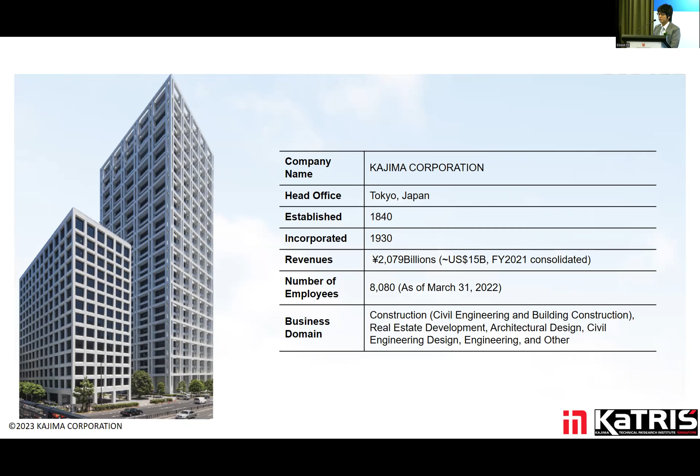I'm a member of the Technical Research Institute. We want to expand our activity not only in Japan but also elsewhere, so now we are especially focusing on Singapore. My department is in the so-called KaTRIS, Kajima Technical Research Institute. Singapore is very crucial not only for gathering good information, but also for disseminating advanced technology. So our role is to develop new technologies and collaborate with very good institutes and companies all over the world.

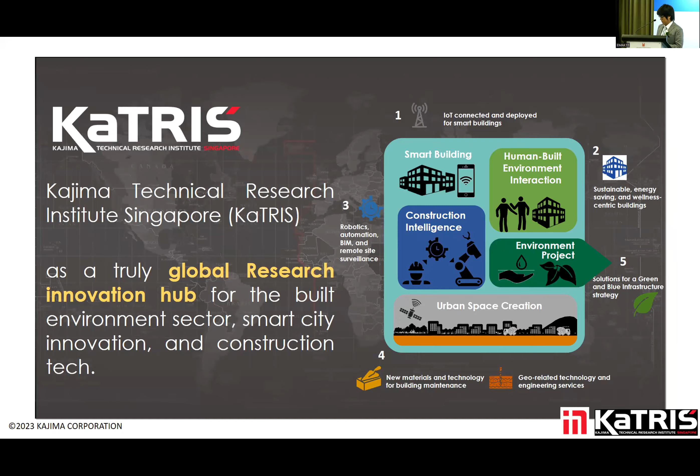Next, I'd like to explain our activity as a private construction company. Firstly, our Kajima Corporation declared the triple-zero goal for 2050. The triple-zero means zero carbon, zero waste, and zero impact. I think it's very hard to achieve by 2050, but we must do it. For achieving this by 2050, we set milestones at 2030.

One of the milestones related to today's workshop is that ZEB, Zero Energy Building, becomes mainstream. Our company is targeting zero energy buildings by 2030 as a major construction product.

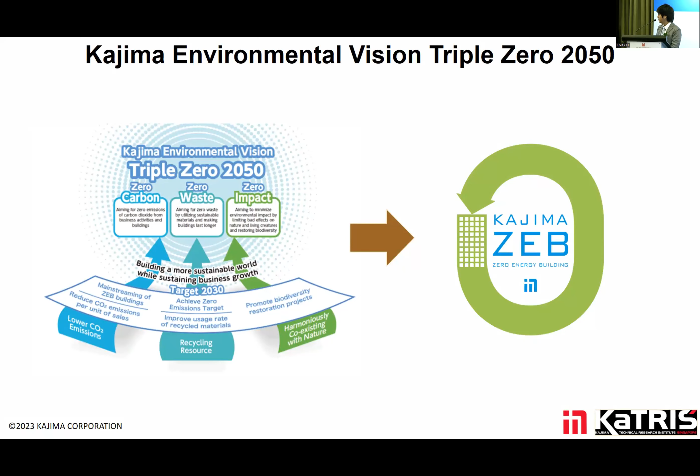Let me explain our policy for achieving zero energy buildings. To achieve ZEB, we set 4 phases of construction work. You can see this one. The first stage is eco-design.

In terms of front loading, it has a big impact, so we mainly focus on this technology. Eco-design includes passive designing, but also introducing highly advanced energy efficiency devices and facilities.

The second is designing for eco-consciousness, leading occupants to be eco-conscious. It's not enough to just introduce the facility and the building. To achieve true ZEB, our human behavior is so important. So to nudge our activity toward zero energy, we are trying to establish the design approach.

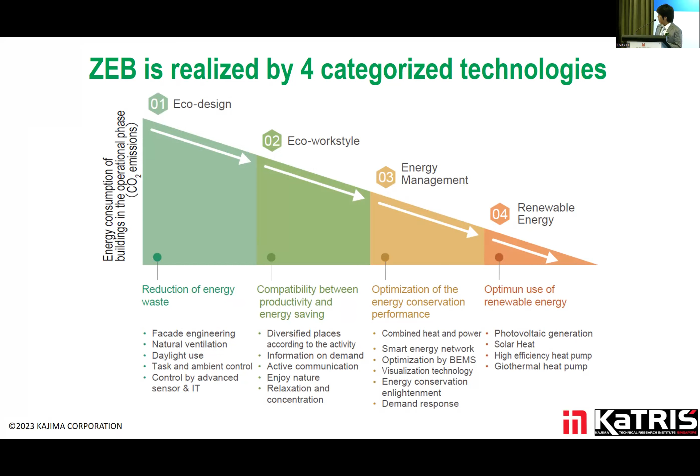Finally, this is the introduction of renewable energy. Firstly, I'd like to show our examples of these phases, starting with the eco-design stage.

First of all, for the design, facade design is so important. The facade is not only a heat source, but also has a big impact on well-being. By introducing design methods for optimization of the facade, we can contribute a big impact on energy savings. For example, you can see two figures.

The left-hand side shows how to utilize the outside environment, not only for the view, but also for introducing lighting, day lighting. The right-hand figure shows how to mitigate the thermal impact, not only heating load, but also cooling load. So both combinations are important as a first stage.

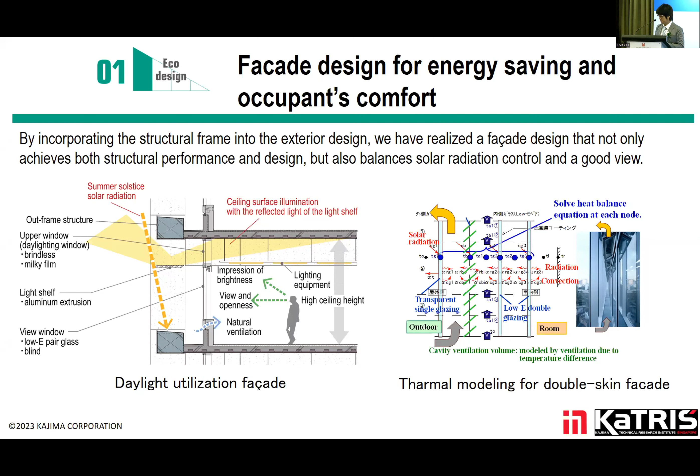We also have a lot of design techniques, but as a second example, let me introduce the hybrid cooling system. Some people explained this system in this workshop. This type of system is very suitable for the Southeast Asia region. It's a combination of the ceiling fan and the conventional air conditioning system. This contributes at least 20 to 30% energy reduction, and furthermore, improves thermal comfort.

Many people want to get more wind, so by introducing this system, many occupants are satisfied with the thermal environment. Finally, this kind of increased air movement also contributes to a reduction of COVID-19 infection.

To be honest, I'm also a member of the supercomputer Fugaku project, which contributes to mitigation of COVID-19 infection. By utilizing such supercomputing power, we understand how background air movement contributes to mitigation. That's why we want to promote this technology.

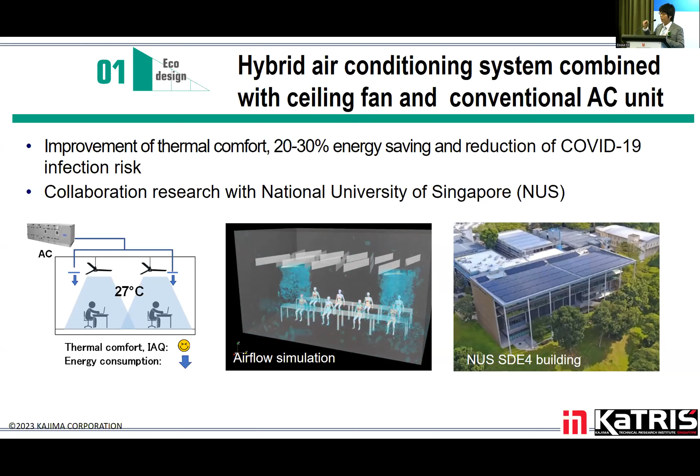As a second topic, I'd like to explain the eco work style as phase 2. This is so important. Maybe you remember Professor Clayton Miller explained the importance of nudging occupant behavior. To do it, we need to establish the way. For example, if you open the window, no need to introduce HVAC control energy.

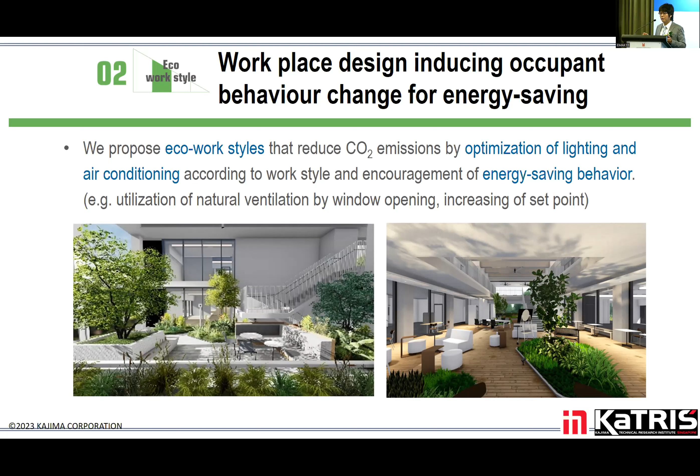Fortunately, Singapore is a tropical climate, so there's a lot of availability for outdoor area. To nudge the occupant toward such eco-conscious activity, we are trying to establish such design. For example, introducing a large window leads people to feel more comfortable, even at a higher set point.

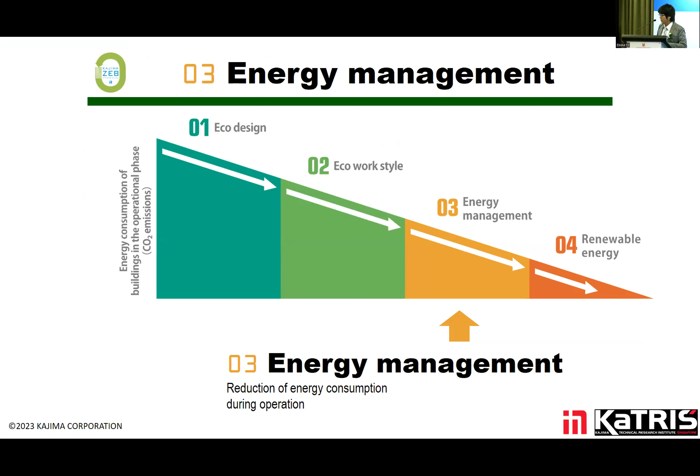The third point is energy management as phase 3. This phase is very common for all people, especially in this workshop. It's important to introduce very efficient energy management for building operation, for example visualization and sophisticated management. But today I won't explain more about this.

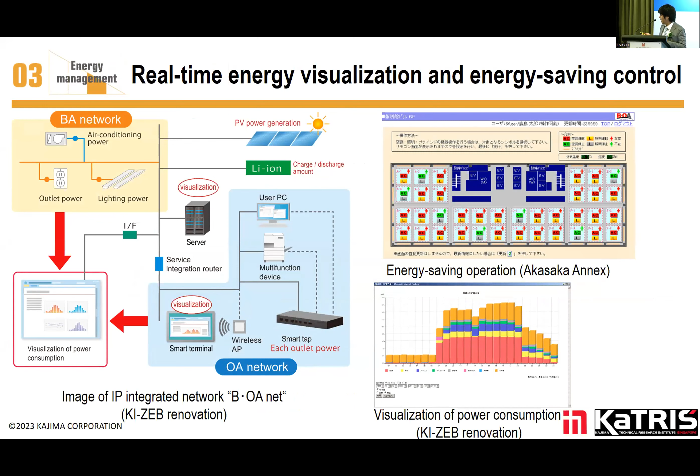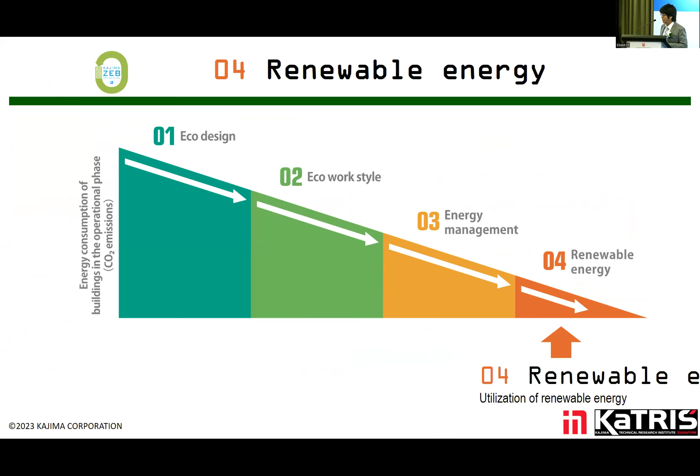Finally, we should use renewable energy as phase 4. One of the main resources of renewable energy is solar PV. This is very common, but we should consider the next phase, for example considering integration with building design and utilization of building integrated PV systems. We are trying to establish such utilization, more sophisticated and wide use in the building.

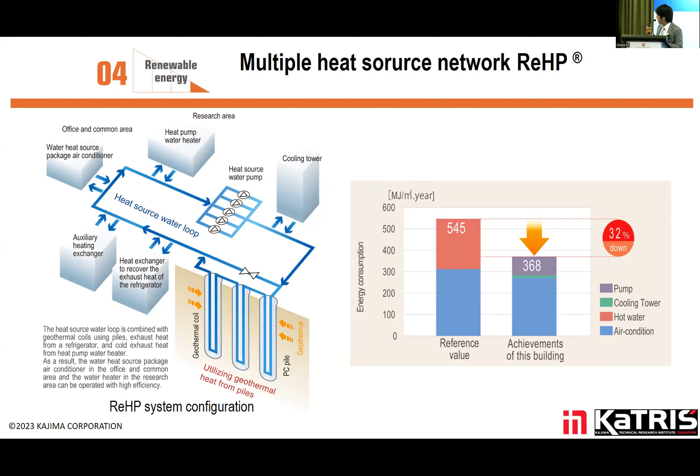I think this technology is not suitable for Singapore; it's mainly for high latitude regions. Our company established multiple heat source networking. By utilizing this, especially for heating situations, we can reduce a large amount of energy. For example, in one case, we achieved 30% reduction of total annual energy.

Finally, I'd like to introduce our new building in Singapore. This building is so-called GEAR, Kajima Lab for Global Engineering, Architecture, and Real Estate. It will open in June this year. The purpose of this building is mainly as headquarters, but another purpose is as an R&D test bed.

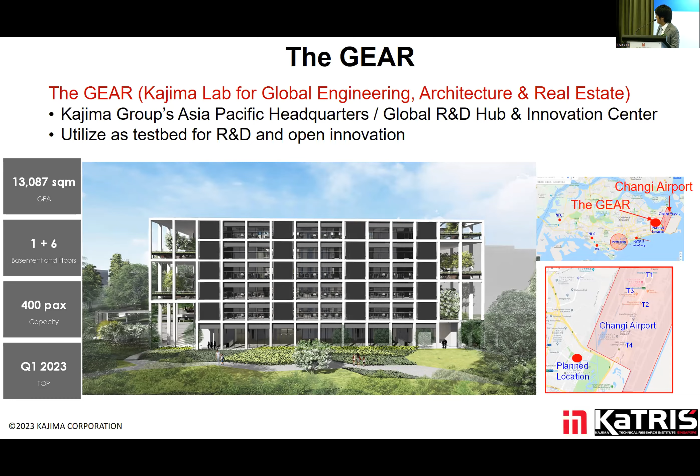As a conclusion, you may be interested in the energy saving in this building. Unfortunately, it's difficult to achieve ZEB because we have a lot of energy-consuming facilities as an R&D division, but we achieved the super low energy building rating on Green Mark. There are a lot of reasons we achieved super low energy.

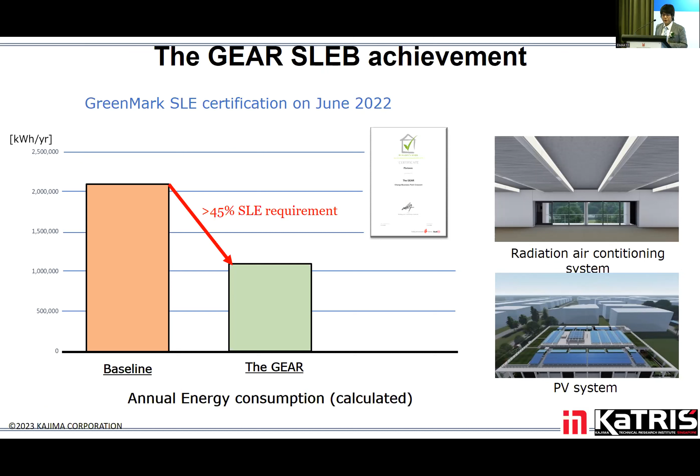For example, one contribution is the radiation air conditioning system, which is a rare case in Singapore. And of course the PV system also contributed. But this is a current calculation. We want to advance more.

We also have a conventional air conditioning system, but at the center of this building there's a large atrium space. This is semi-outdoor, meaning non-air conditioned. But exactly speaking, this is mixed mode: if the outdoor condition is too hot or very hazy, we can close it. But mostly we aim for a non-air conditioning situation.

Through collaboration with NUS, we found that over 80% of the time we can utilize this as a workspace in a non-air conditioning situation. So to reduce energy consumption, we pursue maximum utilization of this semi-outdoor space as an office area.

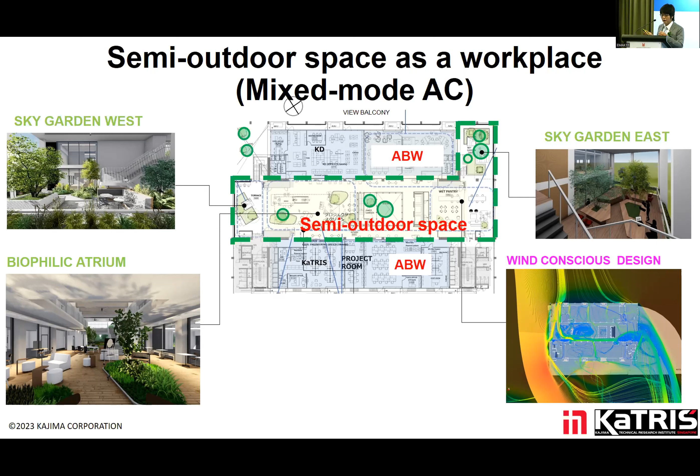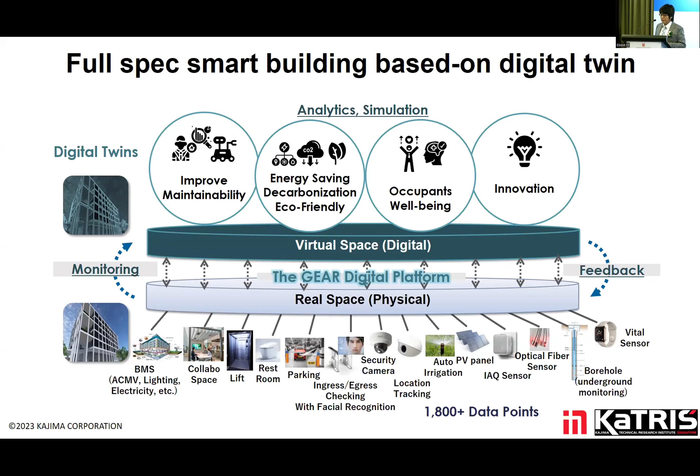Second is the utilization of the digital twin. As a keyword of digitalization, this building is a full smart building. This means we can gather all information related to building operation. Furthermore, we can collect and analyze it, and based on this information, we can control more efficiently.

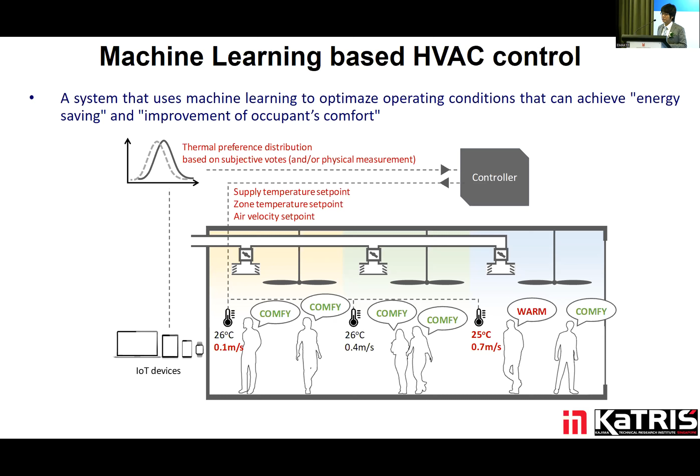This is so-called machine learning based HVAC control. This R&D also contributes through collaboration with NUS. At least we can expect 10 or 20% energy reduction. So through the combination of the mixed-use way and the very digitalized way, we want to achieve more energy reduction.

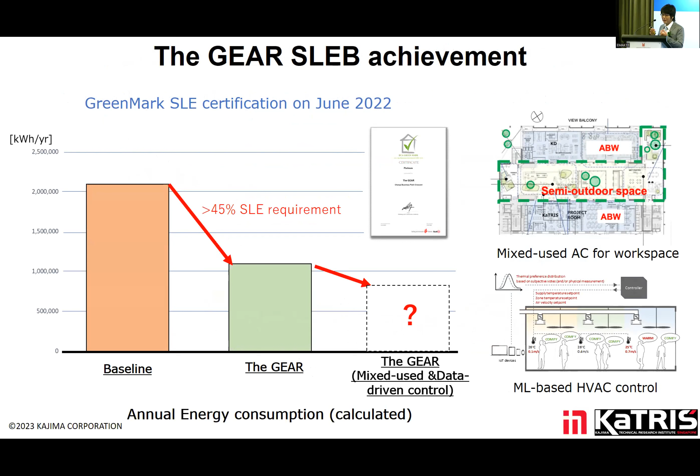But currently it's just an ongoing project. Later, maybe I can share the results at the next workshop. Yeah, that's all. Thank you very much.